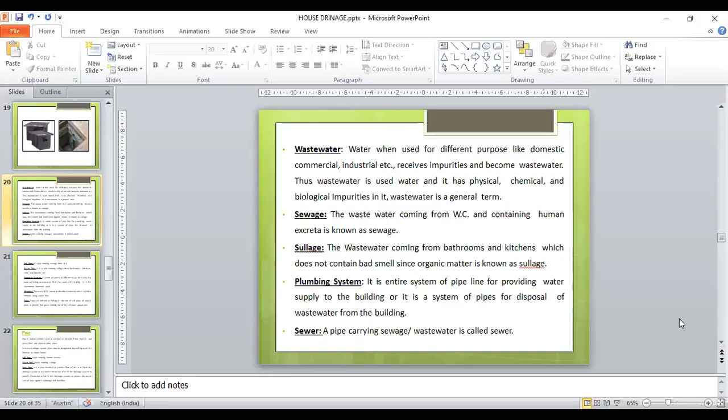Today we start this lecture by learning some basic definitions, so you can understand all this theory we are learning. Starting with some basic definitions. First, what is the meaning of wastewater? Wastewater is the water which, when used for different purposes like domestic, commercial, industrial, etc., receives impurities and then becomes wastewater. So wastewater is used water and it has physical, chemical, and biological impurities in it. Wastewater is a general term, right?

Next is sewage. The wastewater coming from a water closet and containing human excreta is known as sewage. Next is sullage. The wastewater coming from bathrooms and kitchens which does not contain bad smell since it has little organic matter is known as sullage. Next is a plumbing system. It is the entire system of pipelines for providing water supply to the building, or the system of pipes for the disposal of wastewater from the building. Next is sewer. A pipe carrying sewage or wastewater is called a sewer. These terms are very familiar: sewage, sullage, right?

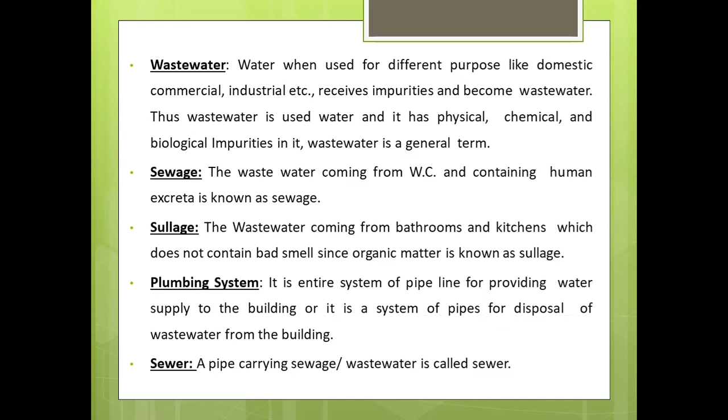Next is a soil pipe. It is the pipe carrying sewage from the water closet. Waste pipe is a pipe carrying sullage from bathrooms, kitchens, sinks, wash basins, etc. So here are three types of pipe. Sewer is the main pipe carrying sewage or wastewater. Soil pipe carries sewage from the water closet, and waste pipe carries sullage from bathrooms, kitchens, sinks, wash basins, etc.

Next is a sewerage system. A system of sewers of different types and sizes in a town collecting wastewater from the town and carrying it to the wastewater treatment plant. This whole system is known as a sewerage system, right?

Next is a manhole. You see in the society or on the road there are manholes, right? So why is a manhole provided? A manhole is basically an RCC or masonry chamber constructed at suitable intervals along the sewer lines. It is basically used to clean out these lines. Mostly provided at junctions, so a man can easily go inside this hole and clean out all the garbage where the pipelines are choking. Then these manholes are very useful.

Next is traps. Traps are defined as fittings at the end of the soil pipes or waste pipes to prevent the foul gases coming out of both pipes, soil pipe and waste pipe. We use this pipe word a lot, so now we go deeper into the basic definition of pipe and what types of pipes are available in the market. A pipe is a hollow cylinder used to transfer fluids, meaning liquids or gases, from one place to another. In a house drainage system, pipes may be designated depending on their functions as below.

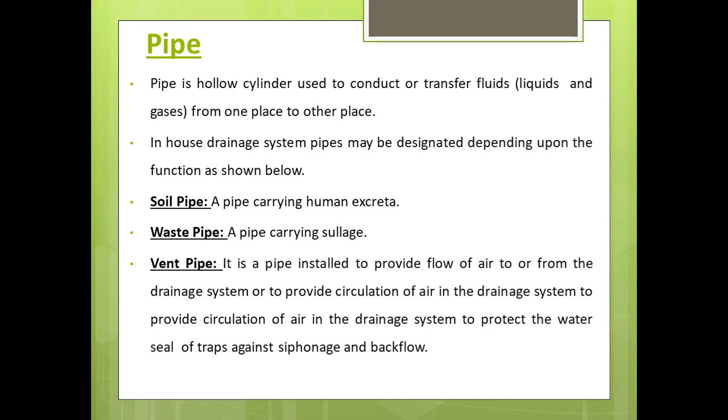Next is a vent pipe. The pipe installed for the purpose of ventilation of the system is known as a vent pipe. The vent pipe is open at the top and at the bottom to facilitate exit of foul gases, and it is carried at least 1 meter above the roof level. Next is soil pipe and waste pipe, which we have already seen.

Next is a rainwater pipe. The pipe which carries rainwater is generally known as a rainwater pipe. These are basic, simple definitions connected to the main word: the pipe carrying rainwater is known as a rainwater pipe. So it is very easy to remember and understand.

Next is anti-siphonage, sorry, there is a spelling mistake here. Anti-siphonage pipe. The pipe which is installed in the house to preserve the water seal of traps is known as an anti-siphonage pipe. It maintains proper ventilation and does not allow siphonic action to take place. That's why it is provided.

So there are different types of pipes, and with respect to each type, diameters are also given. For soil pipe, the diameter should be 100 mm. For waste pipe in the horizontal direction, the diameter is between 30 to 50 mm. For waste pipe in the vertical direction, we take 75 mm. For rainwater pipe, 75 mm. Vent pipe is 50 mm. Then there are two cases for anti-siphonage pipe: when connecting to soil pipes its diameter is 50 mm, and when connecting to waste pipe its diameter is 40 mm.

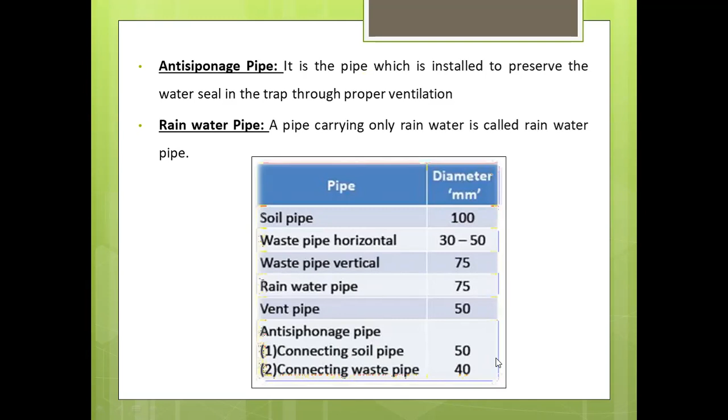Right. So next is the components of sanitary fittings. The following are the sanitary fittings which are commonly used in the building for the efficient collection and the removal of wastewater in the house drain. First, talking about the wash basin. This is generally used for washing hands and brushes. The material used for making this wash basin is porcelain, stainless steel, and plastic.

Wash basins generally have two types. The first one is the flat back pattern, as you can see in this figure. The sizes for this flat back pattern are 630 by 450, 550 by 400, and 450 by 300 mm. Talking about the angle back pattern, the sizes we generally use are 600 by 480 and 400 by 400 mm.

Generally this wash basin is made of white glazed earthenware or enamel iron. Sometimes they are also made of pressed steel or plastic. An ordinary wash basin is mounted on brackets fixed on the wall, while the pedestal type basin is mounted on a pedestal rising from the floor. These are the different sizes available, depending on the different shapes, as you can see.

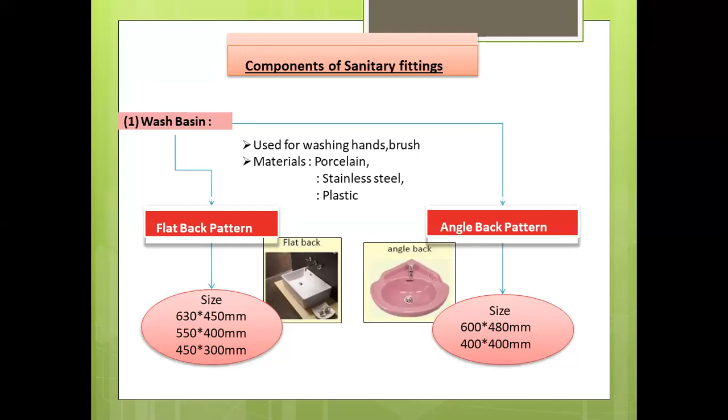Next is the sink. A sink is basically a rectangular basin used in the kitchen or a laboratory for cleaning utensils and glassware. It may be made of glazed earthenware, stainless steel, or enamel pressed steel. The sink has an outlet usually of 40 mm diameter. The outlet pipe discharges water into the floor trap or nahani trap.

The mouth of the outlet pipe is provided with a grating of brass or nickel so that the entry of coarse solid substances is prevented. Common sizes are provided for kitchen and laboratory sinks. For kitchen sinks: 600 by 400 by 150, 600 by 450 by 250, and 750 by 450 by 250. For laboratory sinks: 400 by 250 by 150, 450 by 300 by 150, and 600 by 400 by 200.

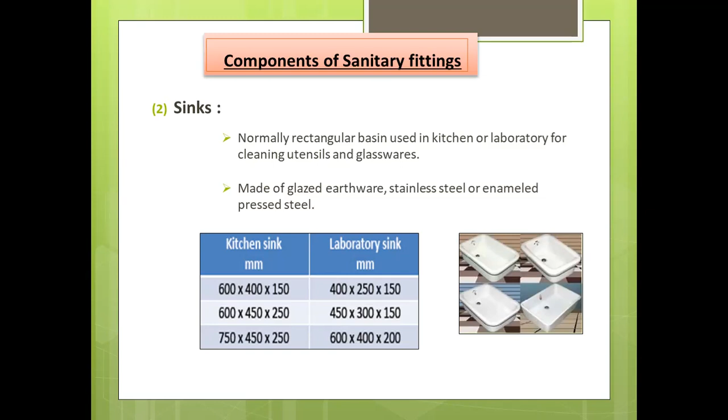Next, we talk about bathtubs, as you can see in hotels or luxurious bungalows. Bathtubs are for a long and luxurious bath. They are usually made of iron and steel coated with enamel, enameled porcelain, or plastic. They may have parallel sides or tapering sides.

The usual dimensions of bathtubs: length is between 1.7 to 1.85 meters, width is taken as 0.7 to 0.75 meter, and depth is generally taken as 0.6 meter. These are the conventional sizes of the bathtub. It is provided with outlet and overflow pipes, usually of 40 mm diameter.

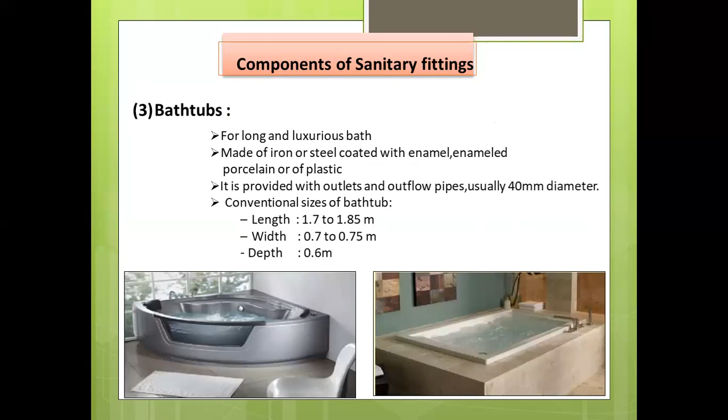I write down only the main points. In the exam, if you remember these small points, like outlet and overflow pipes of 40 mm diameter, made of iron and steel, you can make full sentences from these points. You cannot remember the whole sentence, but you have to remember the main points of the topics, so it is easily remembered and understandable.

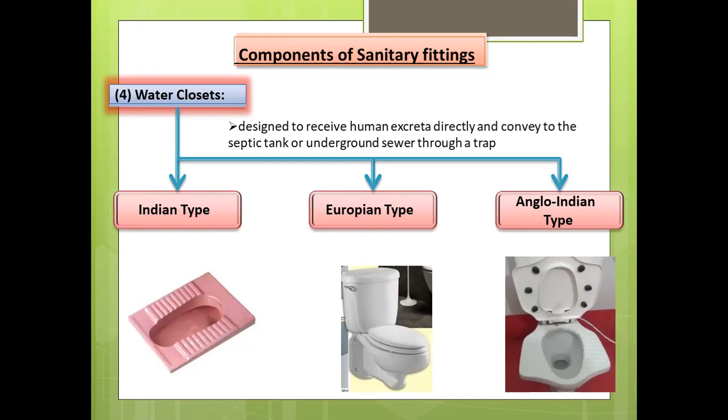Next is the water closet, which we know as WC. A water closet is a sanitary fitting designed to receive human excreta directly and convey it to the septic tank or underground sewer through a trap. It is usually connected to a flushing system to flush the closet and discharge human excreta to the soil pipe. Water closets are of three types: Indian type, European type, and Anglo-Indian type.

Talking about the Indian type water closet, it is simple in construction and working, and is used in a squatting position. It is usually made of porcelain. The pan and trap are available in two different pieces, assembled properly at the time of laying. The closet is set up at floor level and a pair of raised footrests are provided on both sides of the pan. The trap has a hole on the top for connection to the anti-siphonage pipe.

So length of the pan generally varies from 450 to 675 and the water seal varies from 50 to 75. Flushing rim is provided on the top interior surface for flushing the closet with the water which is supplied from the flushing tank or cistern. So this flushing cistern is normally kept above the closet.

Indian type water closet requires a greater quantity of water, at least 10 liters for the flushing, right? So these are the Indian type water closet. I write down the short points, so you can easily make the whole sentence using the small points, right? Which means simple in construction, used in squatting position, made of porcelain, pan and traps are available as two separate pieces.

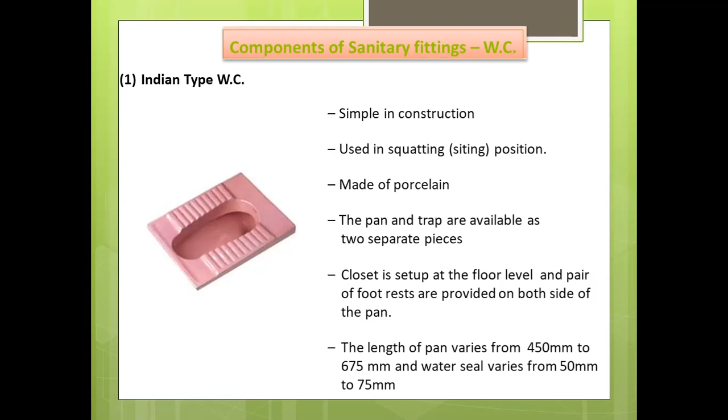Closet is set up at the floor level. Pair of foot rests are provided on both sides of the pan. Length of the pan, water seal, right? So these different small points help you to make the whole sentence, right?

Next is a European type water closet, right? So this figure shows the typical European type water closet. So it's generally made of porcelain, right? It is a wash down water closet provided with a seat and a cover. So a pan has a flushing rim to spread the flush water. Excreta directly falls in the trap, and therefore there are less chances of excreta becoming foul, right?

So pedestal type European water closet, commonly known as a commode, is commonly used. So the closet is fitted with either a P trap or S trap, and it can also be used on upper floors, right? While in the case of Indian type water closet, the upper floor has to be depressed to receive the pan fixed at the floor level.

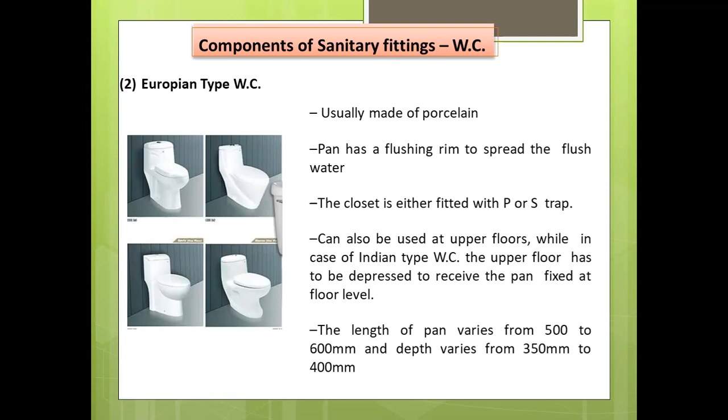So a low level flushing system is used for European type water closet. The length of pan varies from 500 to 600, and the depth varies from 350 mm to 400 mm. Right? So the pan is set up on a pedestal of comfortable height. Right? Next is our Anglo-Indian type water closet.

So the main advantage of Indian water closet is that it can be used in squatting position since it is fixed at the floor level, right? While the European type water closet, which is fixed at about 40 centimeter higher than the floor level, cannot be conveniently used in a squatting position, since the legs of the users cannot rest on the thin rim conveniently, right?

So the defect with the Indian water closet is that the excreta does not fall directly into the trap. This type of water closet removes both of these defects. So in this type, the closet is fixed about 40 centimeter above the floor level, right? So the upper rim of the pan is properly enlarged so that the legs can rest on it while using in squatting position. The excreta directly falls into the water contained by the trap, and the top flushing rim and seat etc. are similar to the European type.

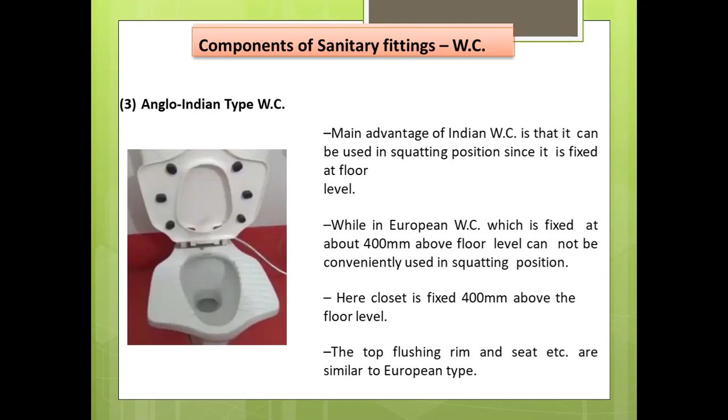Now next is urinals, right? So this has basically two types, bowl type and stall type, right? So the bowl type urinal is used in residential buildings while the stall type is used in public buildings. And the standard size of the bowl for a flat back pattern is 430 by 260 by 350 mm, and for angle back pattern it's 340 by 430 by 265 mm, and it is described in the code, which is IS 2556 Part 6, 1992. So the detailed specifications for these various urinals are given in that IS code.

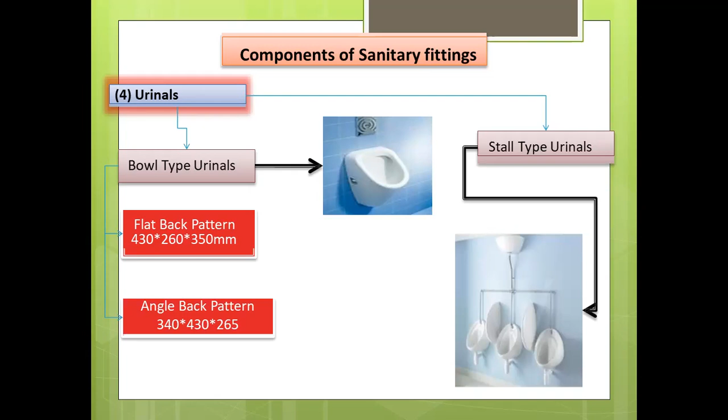So the contents of the urinals are collected and discharged into the soil pipe through the floor trap, which is the Nahani trap. Automatic flushing systems are generally provided for stall type urinals, which operate at a regular interval of 10 to 15 minutes. A stall type urinal normally has more than one unit with a center to center spacing of 0.6 to 0.7 meter. Right.

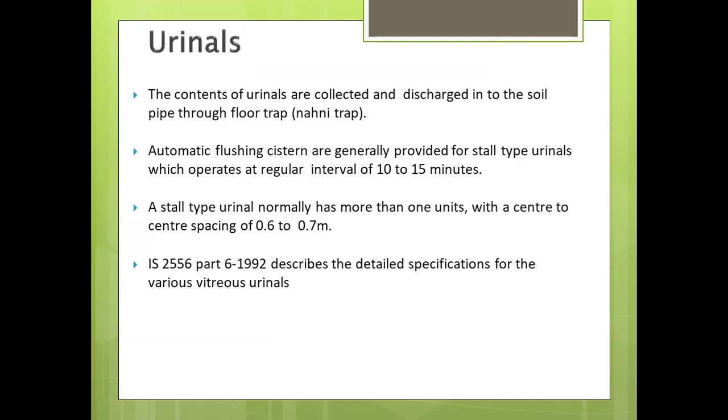So the capacity of cisterns varies from 5 to 10 liters. For Indian type water closet, the CI cistern is fixed at about 2 meter above the floor level, while in the European type water closet, porcelain cisterns are fixed at about 60 centimeter above the floor level. So this cistern has basically two types. First is a valveless siphonic type, which is also known as a bell type, and valve fitted siphonic type, which is also known as a float type.

Right. So bell type flushing cistern. This bell type flushing cistern is commonly used in Indian type water closet, right? It is the typical example of a valveless siphonic cistern, right? So a bell type flushing cistern consists of the following parts: first is a bell, also known as a dome, and second is a float.